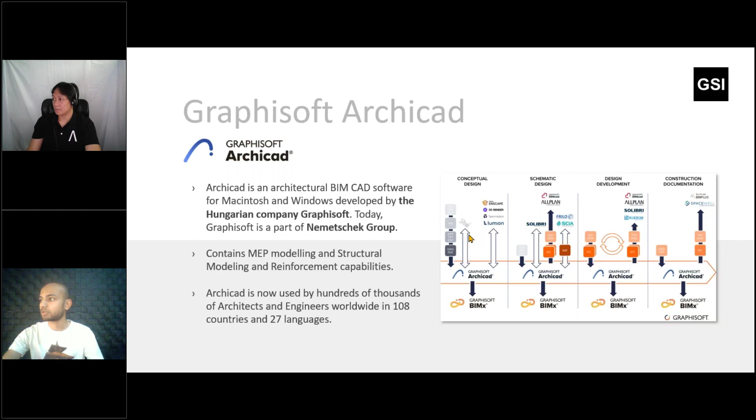On the industry context side, as we also discussed in the last webinar, Jayson and I had a good conversation about what the context is currently in the industry. So the design coordination between the project team is really necessary and essential for limiting design issues and construction site risks. In the construction of any infrastructure, the coordination between architectural design, structural engineering, and MEPF systems is crucial for mitigating construction site risks.

And it ensures project success if we coordinate. For example, let's imagine there's a building project with an architectural design featuring floor to ceiling glass windows, a high-rise building. The architects have designed the glass in a way that maximizes natural light and gives panoramic views. But without effective coordination between architectural, structural, and MEPF teams, this project may face a lot of risks.

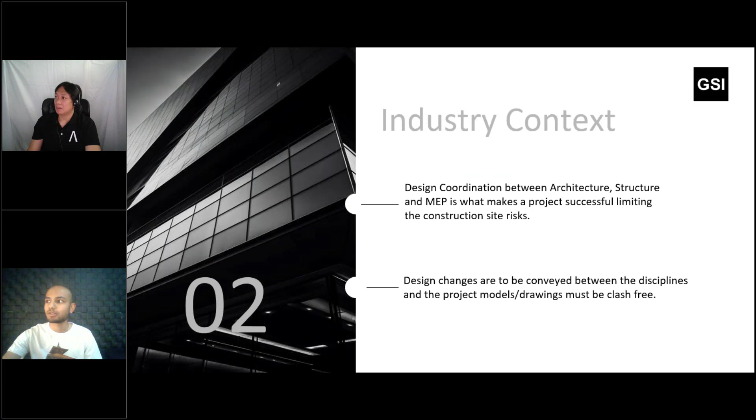So Jayson, do you have a say on the problem statement, which we can also talk about currently, regarding the open BIM approach between these disciplines: architecture, structure, and MEP? Yeah, thanks for that.

Based on the experience I've had before working with the MEPs, the problem is that the precast elements are the end product of the project. So basically what we need to know is the exact information of the MEPs. If they have recess or embedded fixtures, we have to know it in the earlier stage in order for us to really produce the elements on time.

What we face normally is that there are times when there's no proper coordination between different disciplines. So the MEP will most of the time be the last to submit, because they have to confirm it with the architecture or other disciplines.

When we go to incorporate this in our model and precast elements, there are cases where we already produced the elements because we need to catch the production on time. So there are cases where we need to do some hacking in order for these MEPs to be placed in the correct location. That was based on my experience, and this problem will always exist in every project without proper coordination of different disciplines.

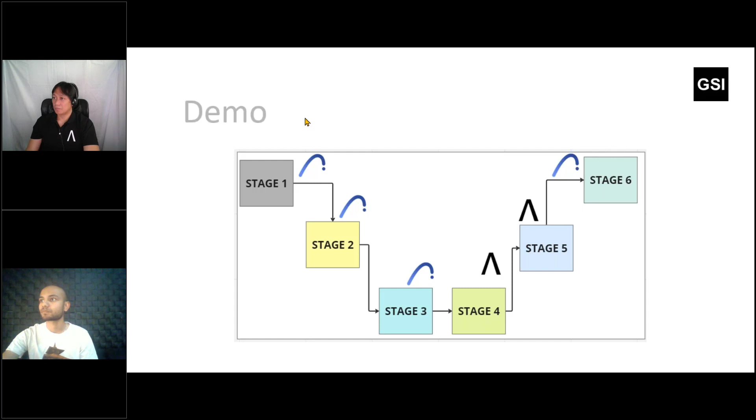Moving on to the general workflow, we have stages 1 to 6. Stage 1 is pre-design phase, 2 is model preparation in Archicad, 3 is MEP model routing, QA and export, 4 is structural elements import, design and adjustments, stage 5 is QA and model export, and 6 is import, verify and model sorting out.

So stage 1, we have the pre-design phase where we have a sample model already ready. On stage 2, we have the Archicad MEP model preparation, where the templates are already ready as well.

Basically, starting a project always requires you to have a correct template, the attributes, and the material libraries all set up. For this, the MEP library as well.

On stage 3, we will be doing the BIM modeling phase, where the MEP design will be clearly modeled as per the requirements. The MEP routing will be used in Archicad, and once that's done, the QA will be done and the model will also be exported towards Allplan.

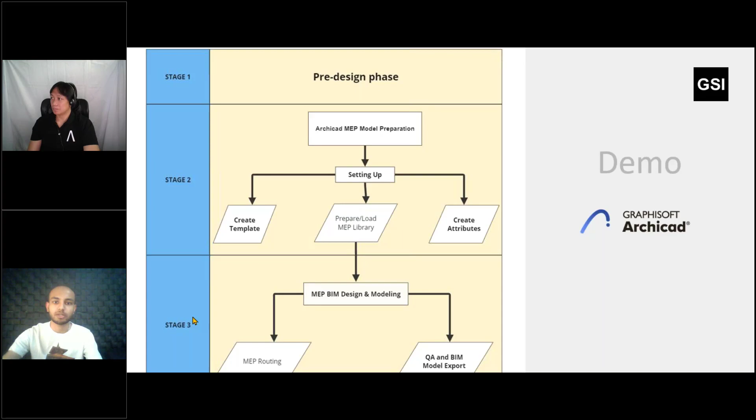Okay, so without further ado, let's start with the demonstration here.

So I have a plan that's set up here where the layers are on. The layers can be seen, which is a combination of architectural model and MEP. If I closely zoom into this parking section here, there's a conduit running out. This is the MEP we have here, and the rest is the architectural model.

So if I try and select the MEP element here, it has a lot of settings that I've already set.

So the system is placed on cabling, and we have an offset from the home story. We have these floor plan and section views where basically Archicad is using these symbols and floor plan display settings.

On the classification and properties, currently it's unclassified. But if we want to have the IFC workflows, we basically have to classify our elements properly so that the design teams from other disciplines can receive them and understand what the element is exactly about. So this is basically a cable carrier segment.

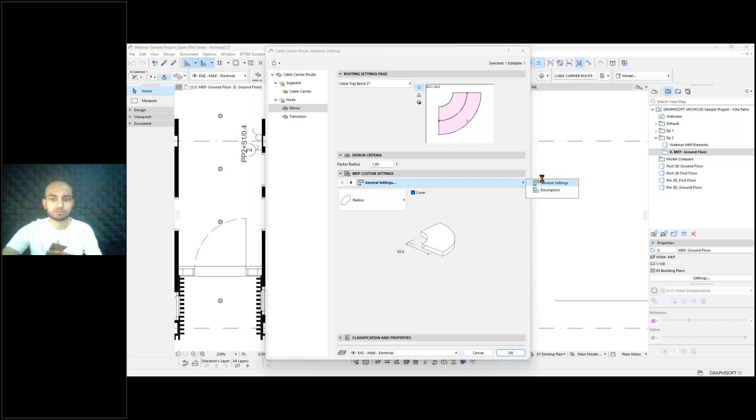So we also have the transition here. The transition can also have the cover or not have the cover. We can fill in various descriptions for this particular transition. We have the option to also fill in the user-defined descriptions. We can have the individual transition classified, and also the IDs could also be set for the particular transition.

But as long as we have the basic cable carrier route here all set with the classifications, we are still good to go. The other ones are going to be much more in detail, the segments and nodes. So currently I've only set the properties for the main cable carrier route, which will cover all these elements. And the layer system is kept at M&E electrical.

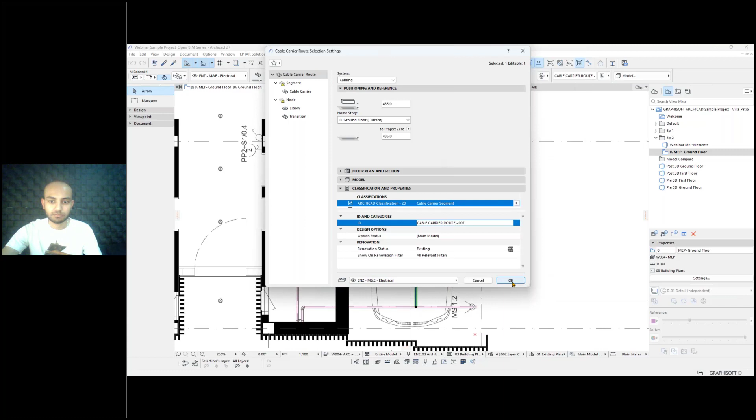So the routing options, basically for this webinar, I will simply just use the design tab where the MEP engineering tools lie, just to showcase how I placed those routes. So if I have this cable carrier route selected and I start to model from over here, let's say, it gives me an option. Okay, before I place it, I need to put it in the right layer as well. So I can go up here and quickly do the electrical, and then start placing it.

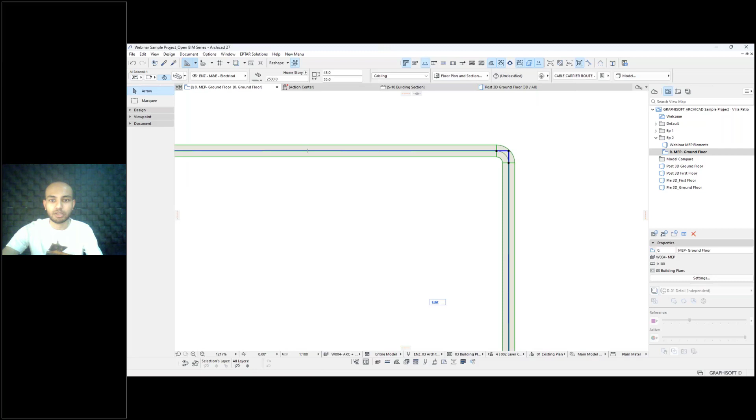So this is the plan view. I can do this plan view here. So as we discussed earlier about the node, it automatically places the node as per the settings we have set earlier. The cable carrier has been placed on the plan view, and now I'm going to view it on the 3D view.

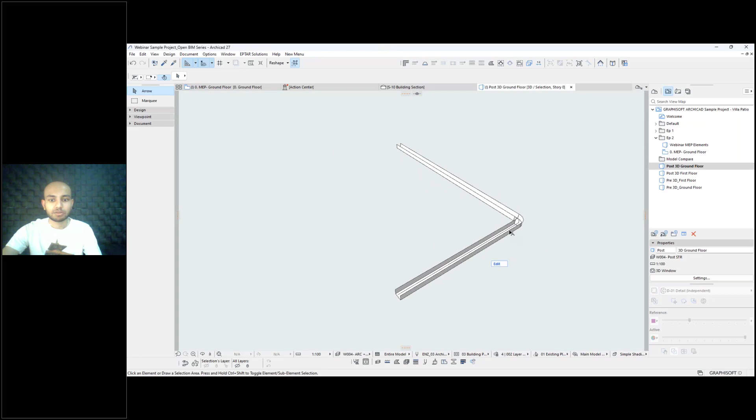So this is the 3D view. We can see the cover is not placed, so we can select that and go back in and try and place the cover as required for the elbows and also the transition. So once that's done, quickly the cover appears. If we want to show every model, I'll just try and show all.

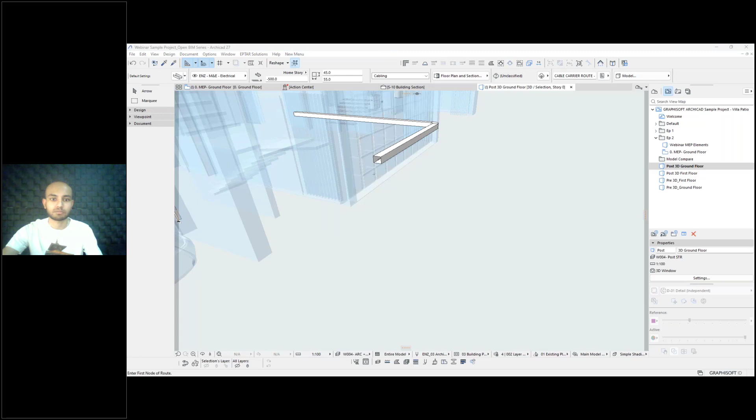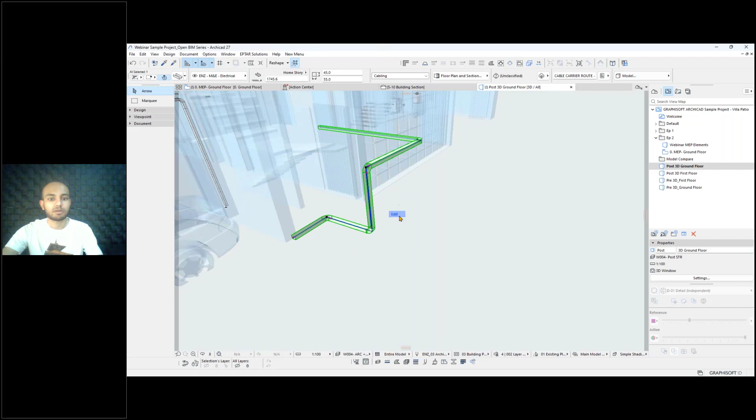So let's say for the example's sake, now the route has to vertically go downwards. So to do that, I can directly use the 3D view and make use of the tracker to basically model the elements. So basically we can model those cable routes, HVAC duct routes, plumbing routes in a 3D environment just by using the tracker.

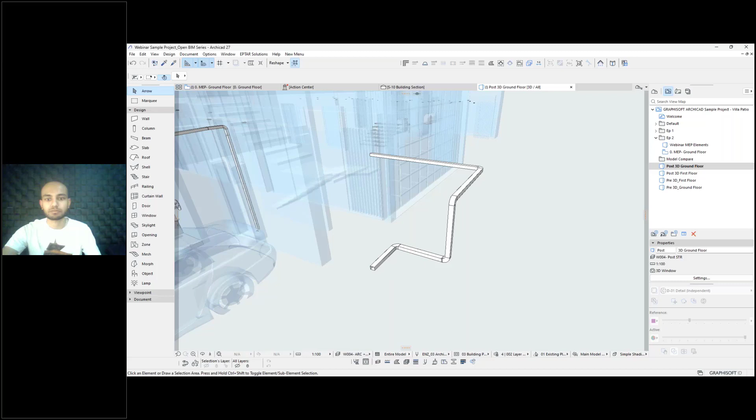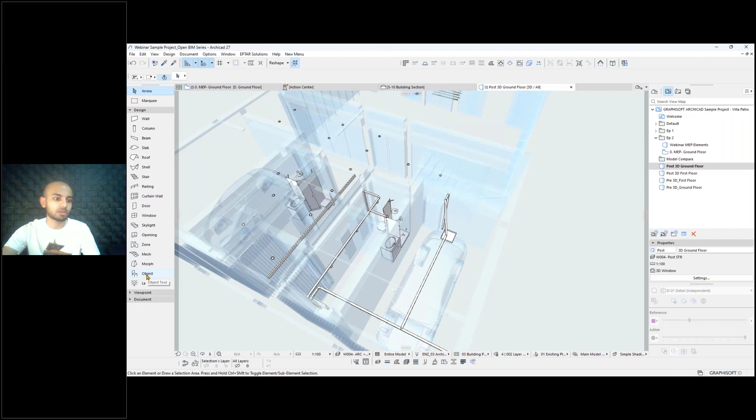So as you can see on the screen, the MEP models are basically modeled in the same manner. I have the electrical fixtures placed as well. We can use the object tools or lamp tool to find the elements we require in the library. So let's say if I want to find any lights, I'll hit on lights, and as per the need, we can select those here.

Or if you have your own material object libraries, it's even better—you can have your own materials loaded. Once that's loaded, you will have to select the lights that you need. All those settings here, the intensity, the distance, width of the geometry, all these can be set in this interface.

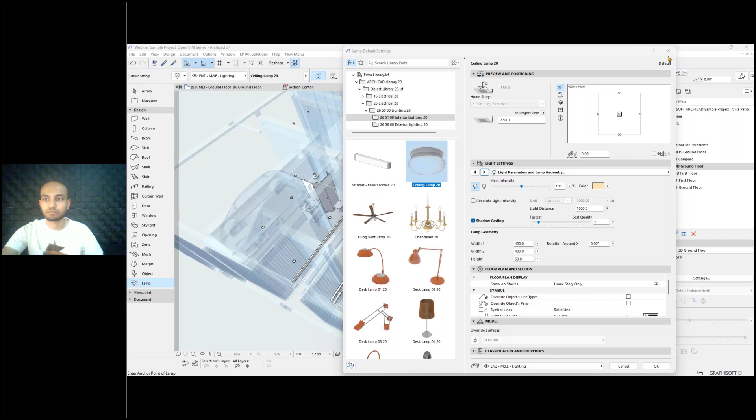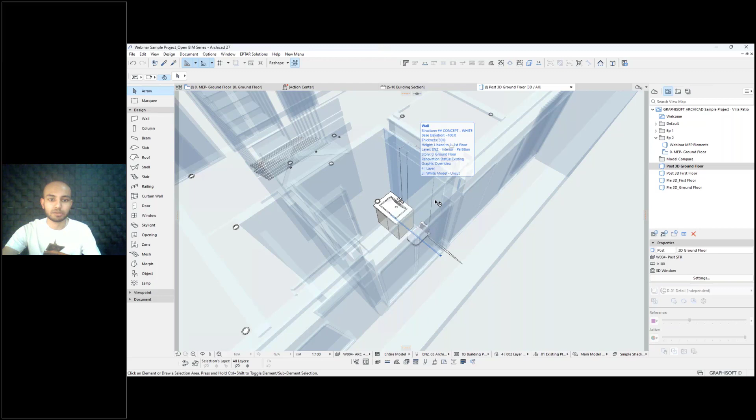The current view that we are seeing has a graphical override powered on, which basically highlights the MEP elements, and the other elements such as the architectural model and structural model sort of phase out or have an X-ray kind of look, so that you can actually see through the walls and doors, whatnot.

The elements which we can currently see here, the piping elements, is basically for the plumbing. This is also done exactly the same way using the MEP engineering tools here, the Pipeworks.

So now, once the stage of MEP modeling and routing is done—basically stage 1 and 2 are already done here, so we did not really see that happen—but stage 3, we had this idea on how to route the cables. For stage 2, if I really want to add here, we can talk a little on the library.

So the library manager is basically present in the file option here, and we can load on the libraries that we require. Archicad already has the migration libraries given, and also for the sample project we have this library all set. If there are any extra libraries that you need, you can go ahead here and add—select the add link library, find your library, and add it.

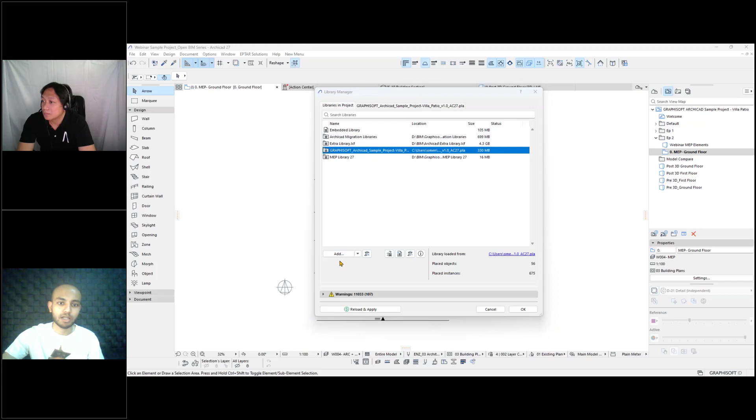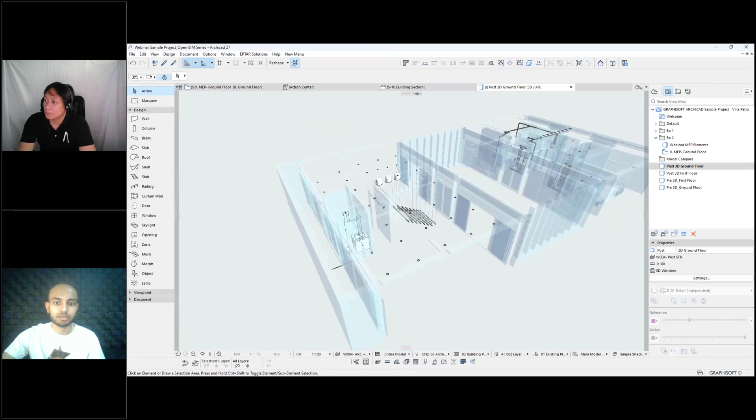So now for the QA and export, as I said, we use the graphical overrides to check for the layers, to check other visibility issues. We can check the layers of every element that's present here. We can see if the elements are having the correct classifications as well. If any element is placed on a wrong classification, we might want to adjust those before sending it out to other design teams so that there's no confusion.

Let's see if I can find a classification for this light. Okay, for this light, it says light fixture already, so it's placed on the right classification.

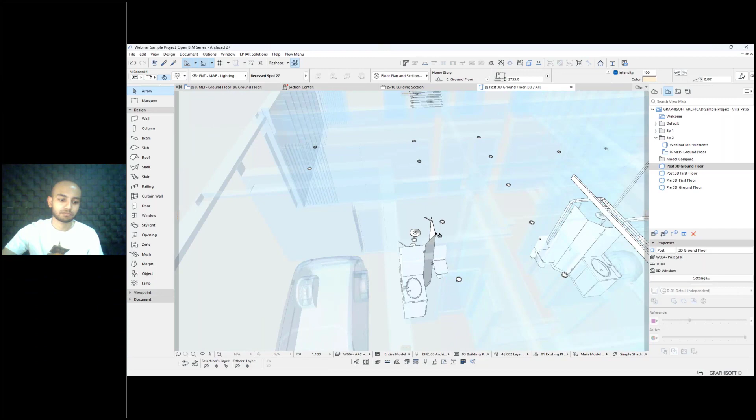So now once that's done, we send out this model to the MEP team or the structural team as well—we just send the latest design. If I just want to send the MEP elements only, I quickly switch over to the MEP layer combinations, and once that's visualized, we can go ahead and do the save as function.

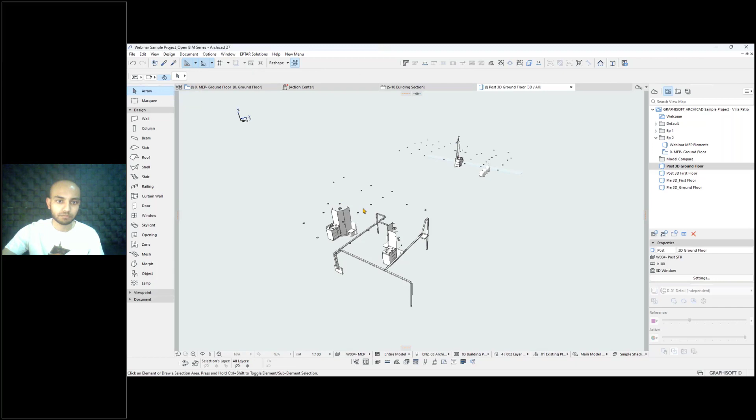So I would like to show you the translator options here, which is currently on a general export mode. All these settings here, the model view definitions, the IFC schemas, the filters, type mappings, and so on are already set. So for this, we will just use the general export.

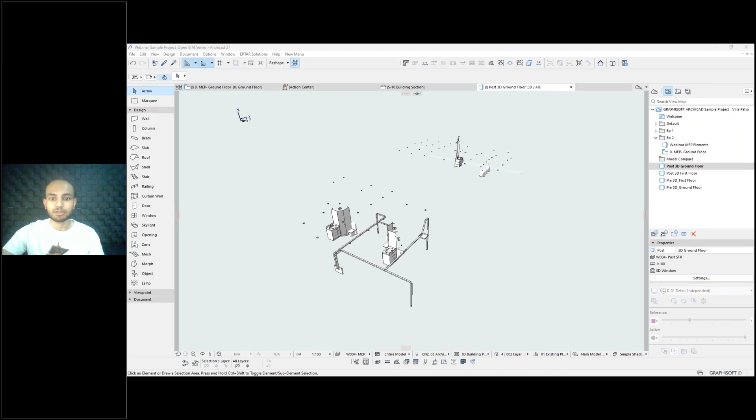So the model has been exported. Now I would like to invite Jayson to showcase how the elements are going to be brought back into Allplan, and the recess and all that stuff will be demonstrated. It's going to be quite interesting to see from his side as well now.

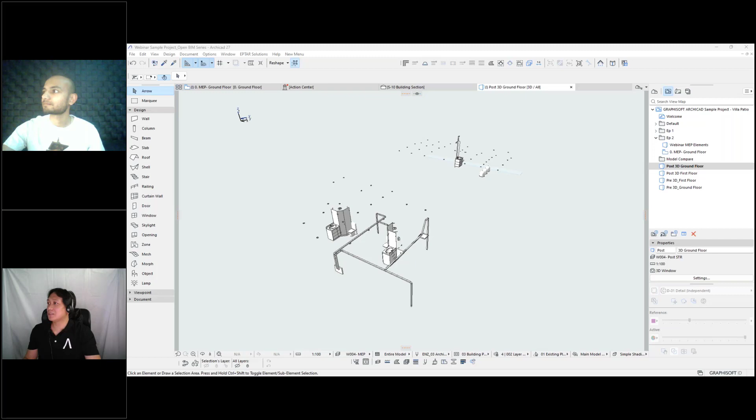Thank you, Sudhir. Right, so basically now you already exported, right? So I can share my screen now. Can you see my screen now? Yes, Jayson, it's visible. Okay, great.

So after stages 1 to 3, now we move on to stage 4, wherein we will import the model from Archicad to Allplan—that is the MEP that was exported by Sudhir. From there, I will show you the MEP functionality for precast, which can generate automatic recess on the element. With this automatic process, it will also adjust the reinforcements and of course the shop drawing changes. Then we will move to stage 5, wherein we're going to export the structural elements back to Archicad so that they can do the assurance or quality check on the elements.

I'll share my other screen. Yeah, you can see my screen now, right? Yes, Jayson, it's visible. Yeah, thank you.

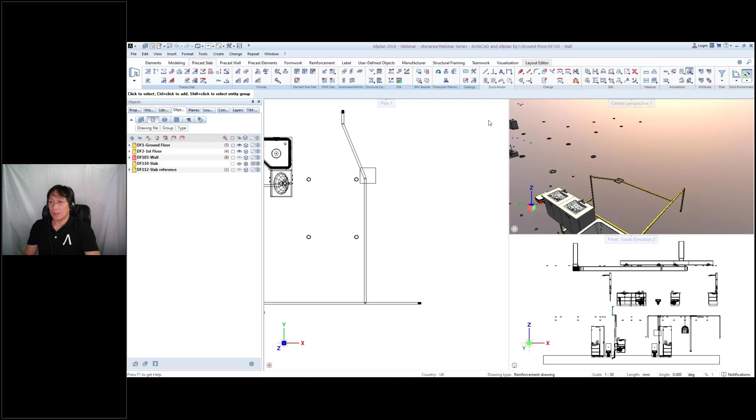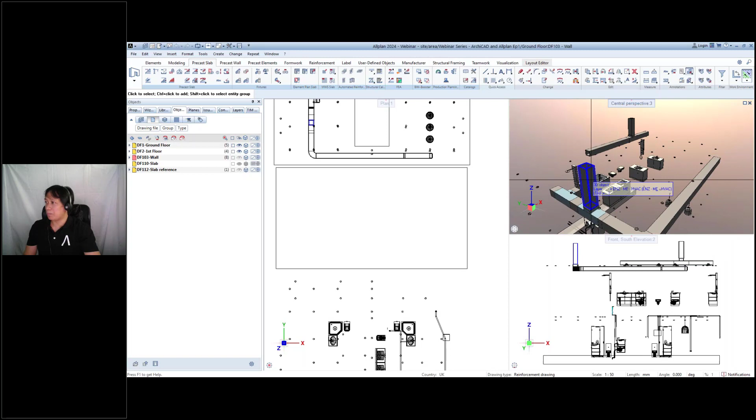So here, I already imported the MEP from the model of Sudhir. So basically, these are the MEPs he modeled initially. This is the one he's discussing, with this cable tray here, cable racks. And of course, we have these kinds of ducts that will be passing through the slab for the next level.

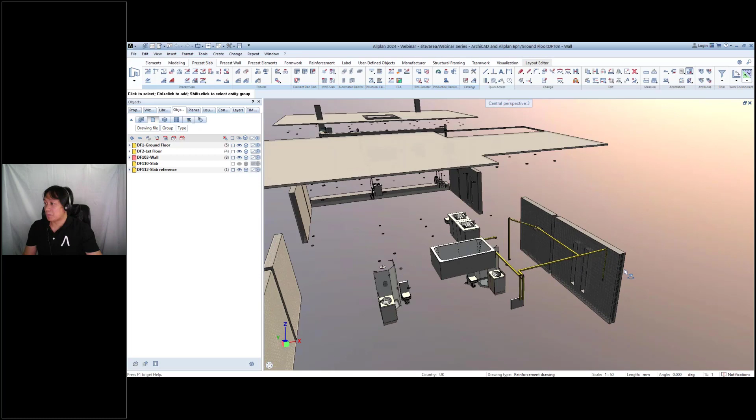So if I'm going to show you something like this, I will have a slab here, and later on I will change this to a precast slab. From the model, previously in episode 1, I showed you that we have these walls which we created as precast elements, and we have placed some reinforcements in them. So you can see here that there is this thing inside the precast wall, and the same for the slab. First, I will show you how it would interact with these precast elements and how we can generate the recess using this imported MEP.

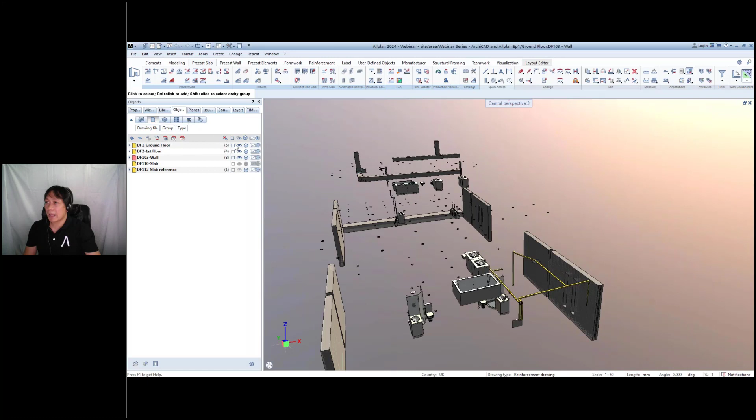So let me just remove those unnecessary things here. I will remove this slab, not this one but this one, so we can see it more clearly. For this case, this is the only part where it goes into the precast element or the wall. So this is where we're going to focus now.

So here, what we're going to do is go to the precast wall, and we have this functionality of MEP Wizard. Once we click this one, you have two options, two objects to be selected: either smart symbol or 3D objects.

So basically we have here, let's check. We can select this and you can see it's a 3D object, so we can use this as a 3D object. From this, for this case, we will provide a recess for this precast element.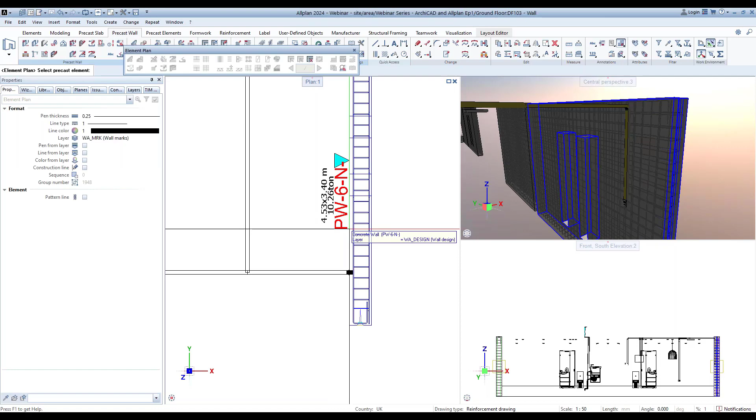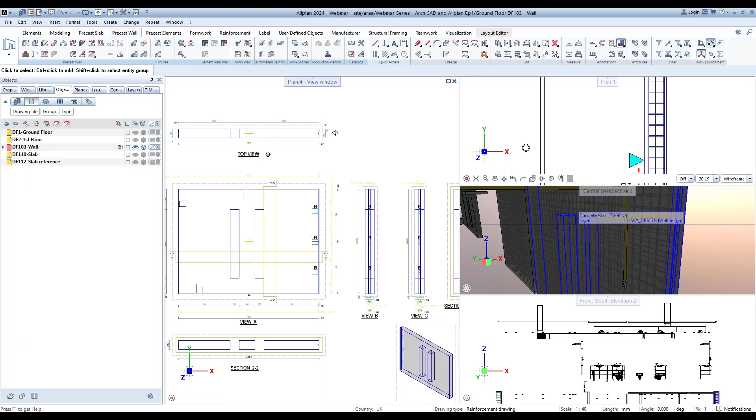Before that, I can show you that, as I mentioned, we can easily generate the shop drawing of it. So we have this shop drawing. Here is the sample, automatically generated. I open this one so you can see how interactive, how they synchronize whenever we do some changes. So I will leave this open, and maybe close this part so they have a better view.

So what we're going to do now is click this MEP Wizard, and then select these 3D objects. I will select the component, which is the precast element, and then we'll be asked to select the MEP objects. So I will select this part, and as you can see, I have these 3 elements. If I click on this one, it highlights which object you are selecting, this one or this one. So basically these 3 are the elements touching my precast element.

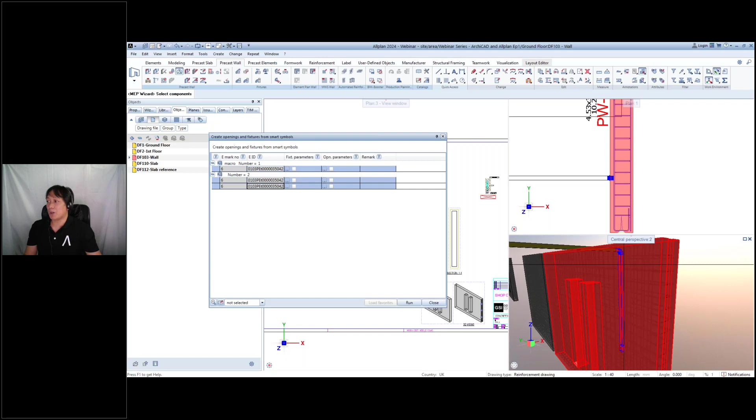So what I'm going to do is I want to make them, or provide an opening to these elements, so that whenever the MEP comes in, they will just place this on my precast element. So what I'm going to do is click on these three dots and select parameters. Here I can say either rectangular based, rectangle based on center, or circle based on center or circle. So maybe I will use the rectangle here so it will detect the perimeter of the object and offset based on the perimeter.

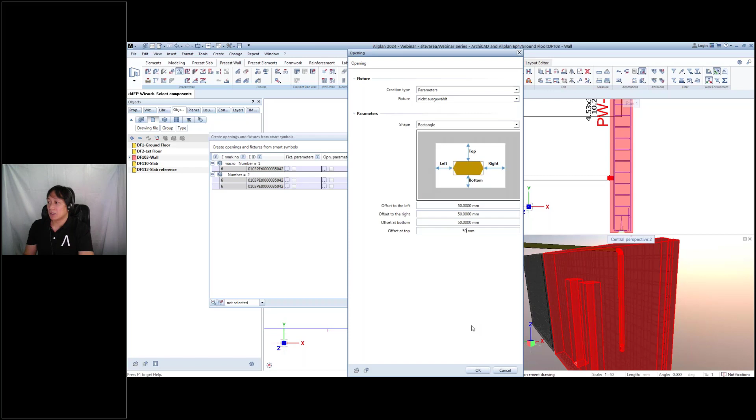So I will just exaggerate. Let's say I want to have a 50 gap from that object. So once I select OK and then run, these are just for the bars, as you can see. So here it gives you automatically the recess. Let me just zoom in. Okay, so you can see here that I have provided a recess.

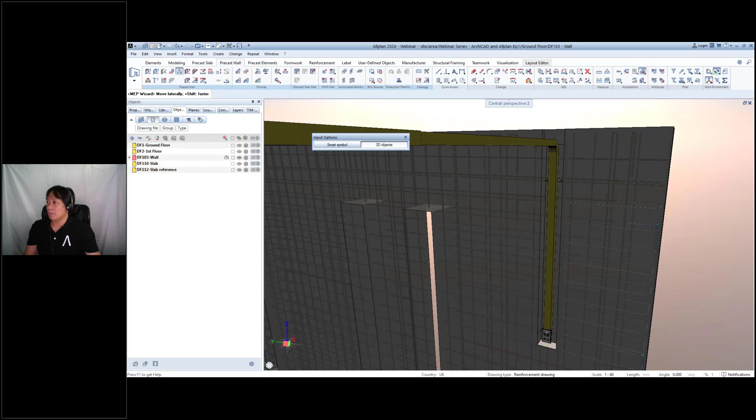And from this recess, you can see that the bars are automatically cut out. For this case, you can see that this bar was not cut because it acts as the holding bar for this part. So of course, on the side, you can just cut this if it's really needed. But for the other bars, it was already cut out. Okay, so this is how your MEP Wizard works.

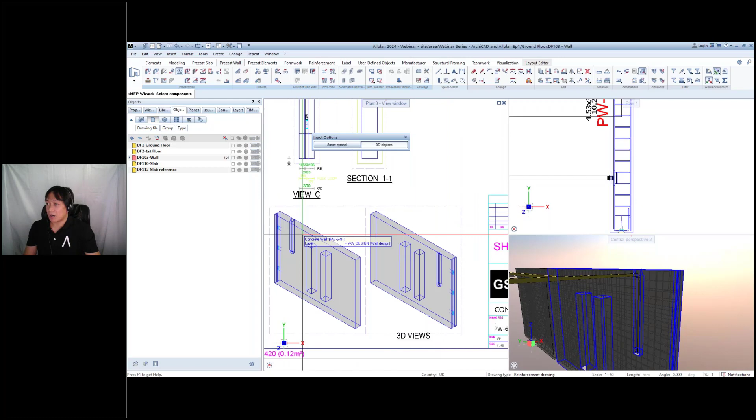And of course, once you do the changes, as you can see from this part, you already have your cutout. So you can see from here, there are cutouts. If I go back to my reinforcement, as you can see, there are some parts that have lines here, meaning it was cut, as well as these isometric views shown. Okay, so this is how the MEP works.

Now, basically this is not only for cutouts, but it can also be, let's say, we want to embed this fixture inside the precast element. So there are cases, let's say I want to copy these elements.

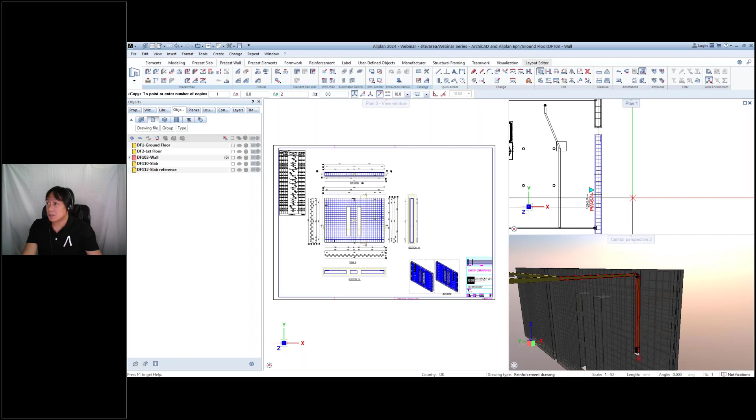So I will just do copy and move somewhere here. Let's say I provide on the y-axis a distance of 2.9. So I will have another, let's say, cable here with the same socket, but I want to embed this fixture inside.

So what I can do is do the same process. I will select this MEP wizard, select the element, MEP wizard. I will have the same properties, but instead of the opening parameters, I will just use the fixture parameters. I just need to see which one I'm selecting, so maybe I can select this one and fixture parameters.

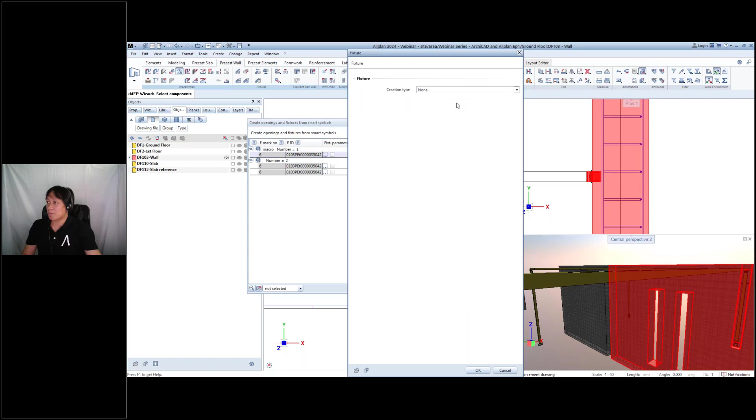So I will select from my library. I just want to show you that from the object we selected will be this. So we will replace this with the whole part of the cable, including the switch. Let's try to select which one, project, webinar, elements, MEP, and then we will replace that one with this fixture. So it's one object already. I will just say okay.

So from here, I will just rotate this and adjust based on the correct location. This one is pre-calculated, so just to make our time less, I will define the location, say okay, and then run.

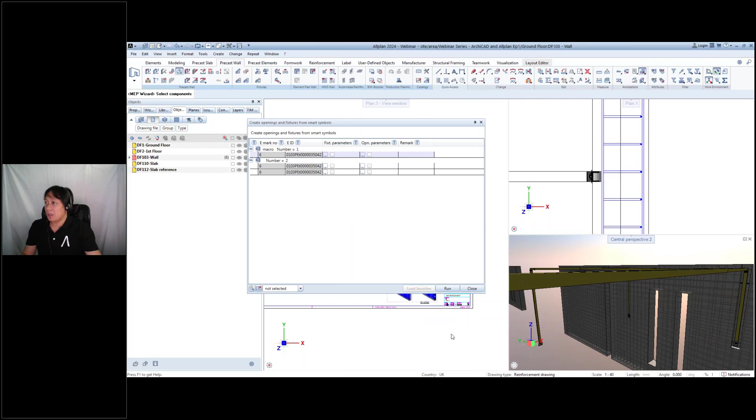As you can see here, nothing changed because it's still the same place. But if we open the shop drawing, as you can see here, it gives you the fixture. It places the fixture that you have created. It's this one, okay.

So basically, it's not only creating the recess, but also placing directly your fixture, or your MEP elements. So to see it in an isometric view, I just have to close this drawing, and as you can see here, I just remove the view. Let's remove the view and open this.

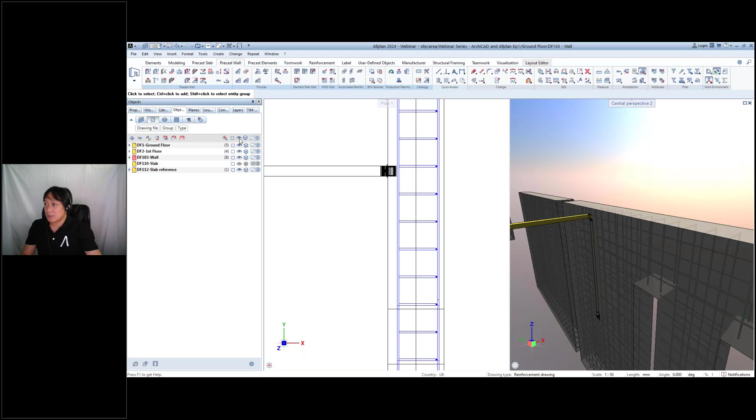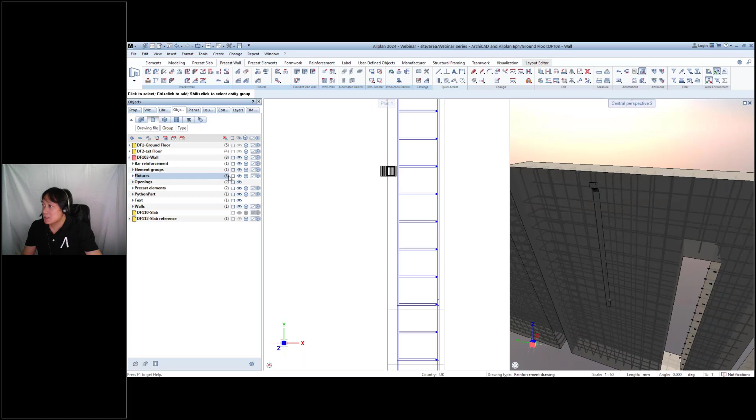As you can see here, it is also inside your precast element. So maybe I can say remove this, no, not this one, but the walls. Yeah, this one I think we can select. So this is how we can select the object inside your precast elements.

So let's say there are cases where you need to shift this by only 2,800 from the other one. So what I can do is move this, the one I copied. Maybe I can say move, not this one, but this one, move the object. Of course, we can move it

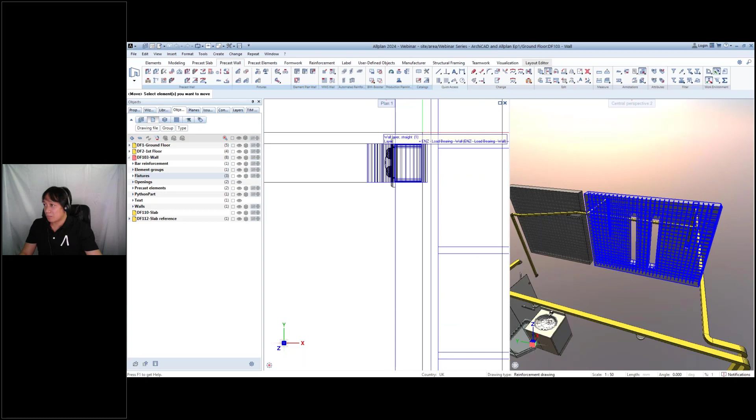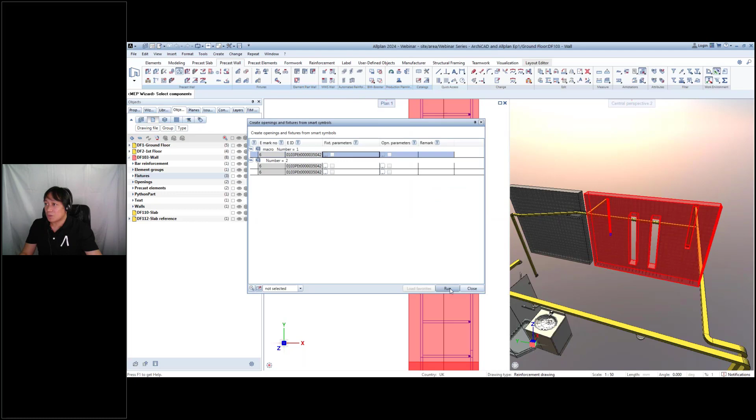directly on the fixture that we placed, but we want to move this element, not this one, but the rest. So maybe I can remove it first. Let's try to remove it first. I don't want to see it. So I guess there's no more, right?

So let's say I want to move this part, or better this one, the recess. Let's say I move this part maybe another 200, maybe the location was wrong. So what will be the effect? Your precast element will already be wrong because your recess will be here.

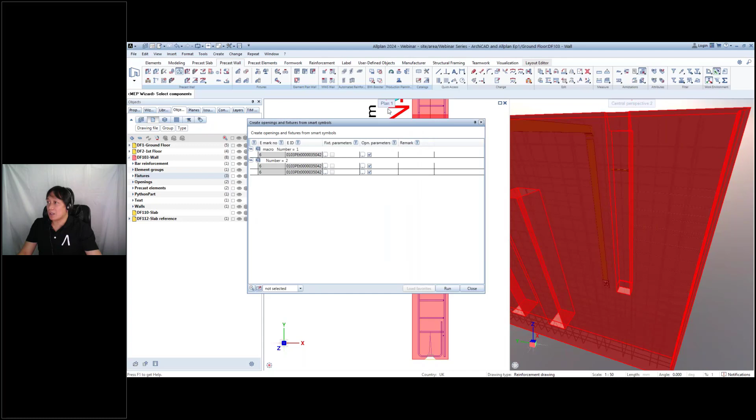Using the MEP wizard, we can just select this MEP element and rerun this, and you will see that your recess will adjust based on the new location of your MEP. Same as what we did here, we can change the location of this and it will automatically shift your fixture.

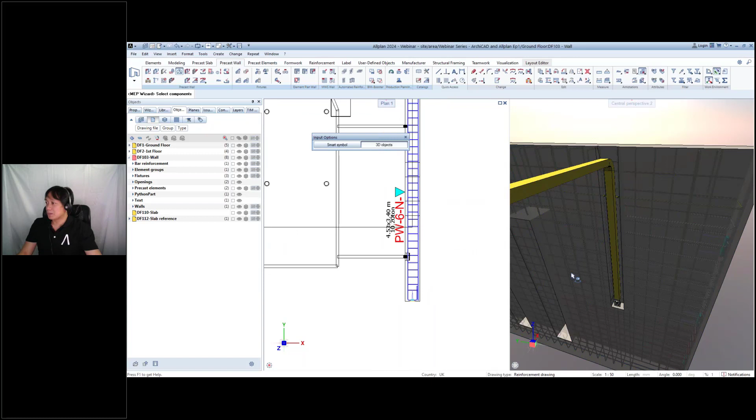So yeah, this is for the wall. Okay, so we can move it back. Okay, and then we move now to the slab, wherein we have these ducts here that are passing through this slab. So I will just need to open my slab. I have to open this and make this my default.

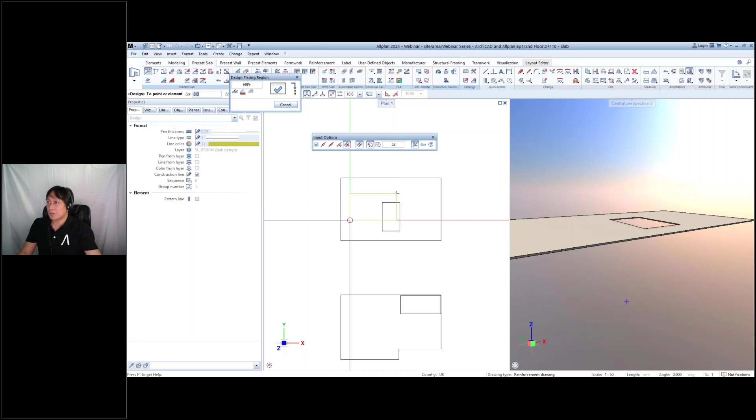I will just open my reference, and I can generate the slab here. So basically, what I'm going to use is a precast slab, like what I've shown in episode 1. Select the design, and then I will select the boundary inside. I can say, yep, I have to select the boundary. Normally this should be okay, so let's try to have this.

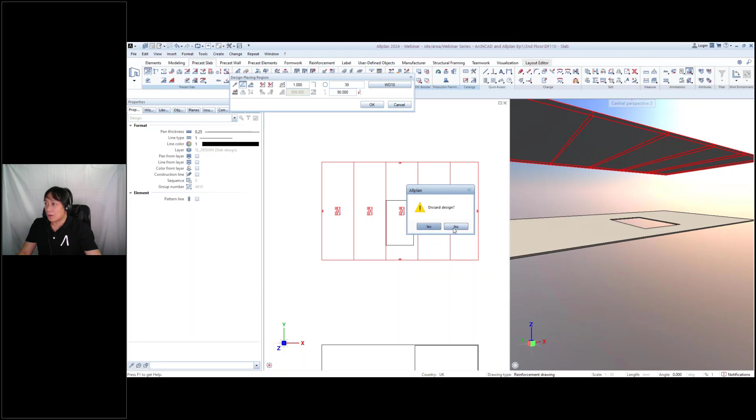And then we don't want to discard, and we just say okay. So basically I have this. We can provide cutouts.

So we need to have this cut. What is the size of this cut? Let me measure, so from here to here, it's about 2150. Okay, we can just say provide recesses, then we can define this.

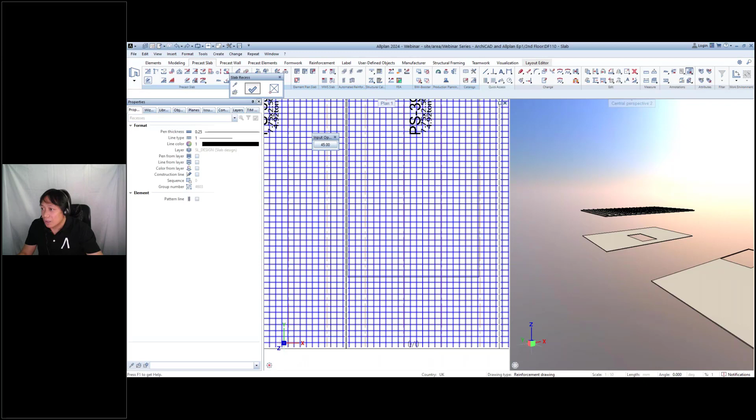What happened? Let me try again. I cannot find recesses. I have to change this by what size? I forgot, let me try to measure again.

This is 2150 and 3540. 150, 3540. 150, this one 3540.

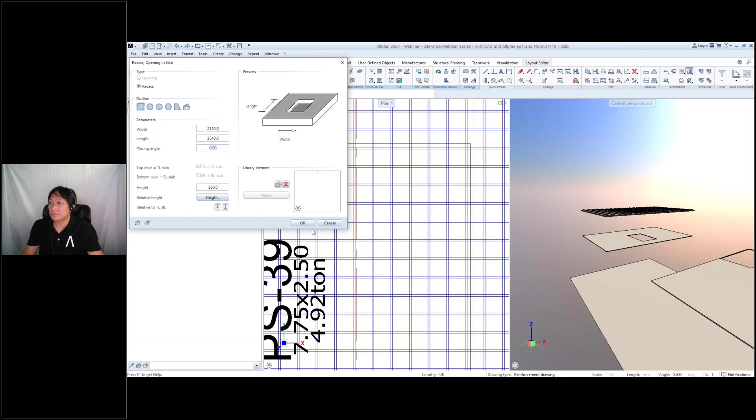So we have this now, and then I will just select this part, so I will have my pieces. Where is it? Let me check. Oh okay, this is my slab pieces.

So from here, I need to shift my model, but before that I need to check if it's in the correct level. Yeah, I have to shift my model, so let me shift them down.

Let me check where's my reference, I have to open them. So I need to shift this to this level. Basically, I just need to fix my X.

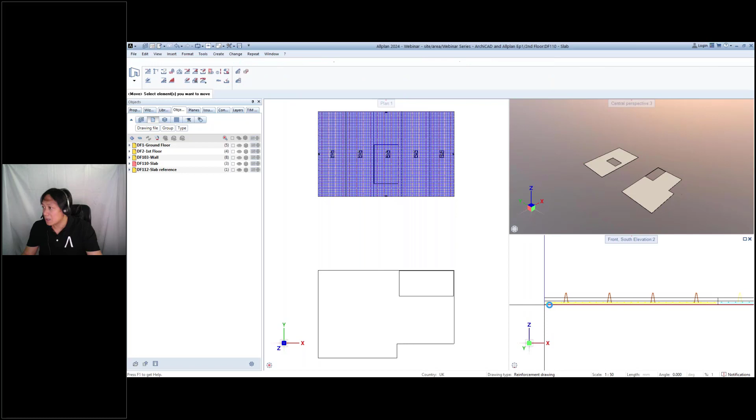Then this also slab recess. I need to fix X somewhere here so that I will have my opening.

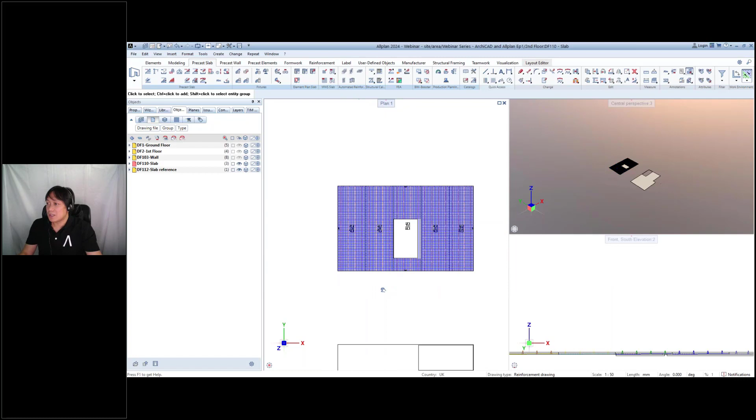Okay, delete this part. Okay, now I have this and I need to have my duct here.

So I will just open my slab and then my duct, which is the other one. Okay, so here it's passing through my elements, so I don't need this part.

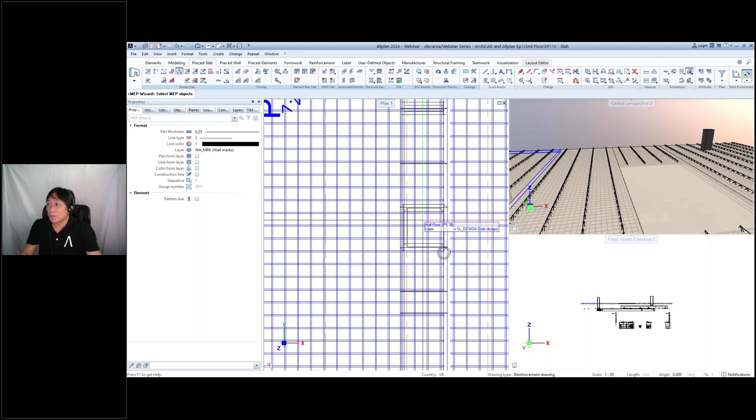So I will do the same using the MEP wizard, and I will select my element and then select my, where's the dot? It should be, oops, sorry. Let me do it again. Select the element

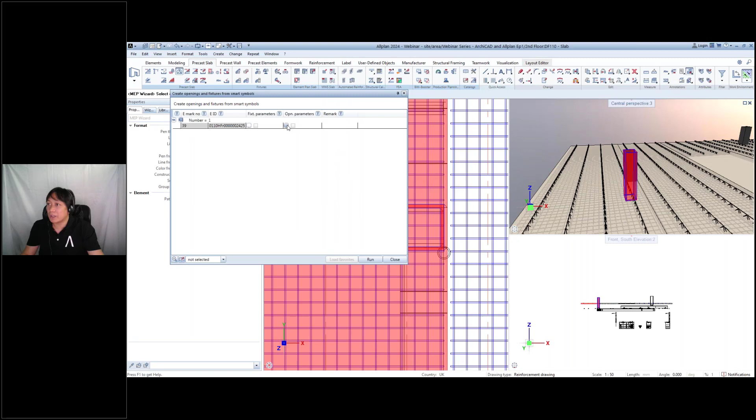and then the MEP, so I will just have to select this and I will provide the opening. Of course it should be an opening because it's a duct passing through. So I will just use rectangle and maybe change to 50.

Say okay, and then run. So as you can see from here, my slab reinforcements also cut. My slab has cut out based on the parameters that you provided, so it's a 50 opening, 50 from the edges of the object.

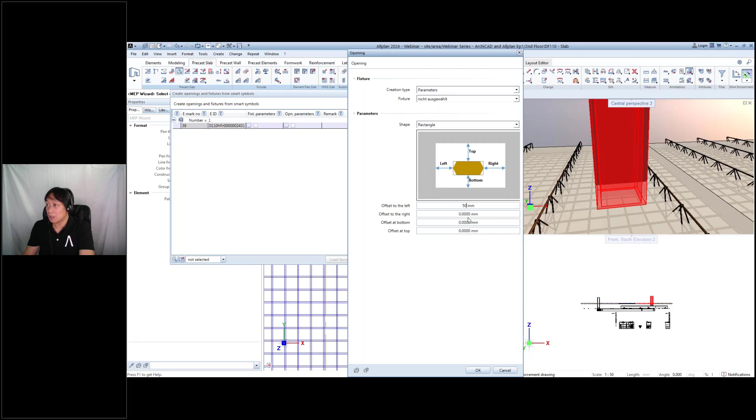Same as what we're going to do here. I will just select the component, select the MEP, and I will do same parameters, and then say rectangle 50, 50, 50, 50, and then run. So basically you will have this opening as well on the other side.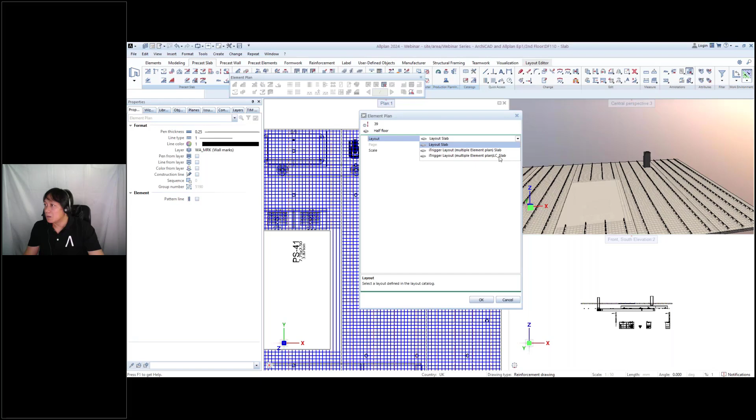And of course, shop drawing wise, what you have seen from the slab, it's also the same. Maybe we can try to create a slab here. Let's try if this will work, because I didn't change anything here.

But of course you can see here, it has these recesses or opening with the girder cut, and of course the reinforcement as well. So it automatically generates the information you provided.

Again, if we move, let's say we move this object from here to, let's say, y-axis about 500. So let's say your MEP changed, of course this recess needs to update.

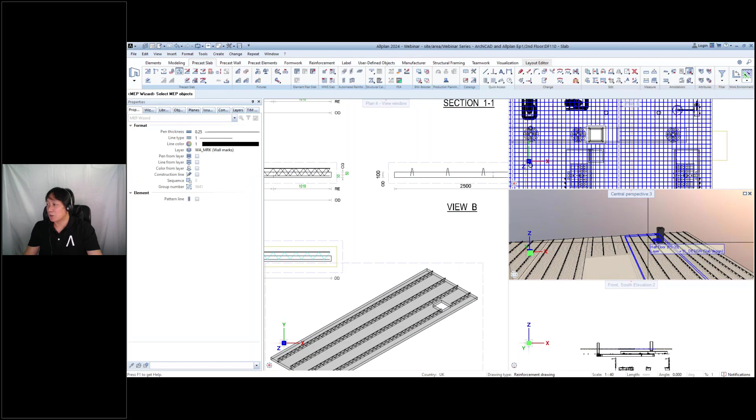So what we're going to do is we do the same. MEP wizard, select the object or the element, and then the MEP object.

And then here, instead of this, you just have to rerun, and automatically it will adjust on the new location for your MEP, so it will give you the proper dimension. Okay, so that's the power of the MEP wizard.

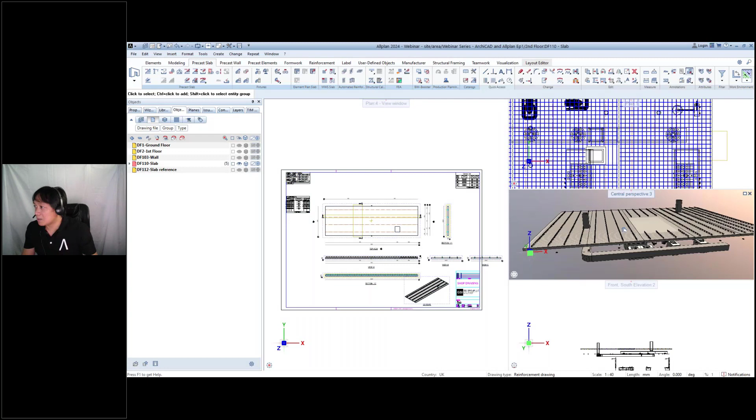So what I'm going to do now is stage 5, wherein I will send this by exporting the IFC model to Archicad, back to Archicad. Only these slab elements and the precast wall by exporting IFC.

And then I will have to select which element, so it's the wall and the slab, and I will just say OK where you want to save it. So it will give me on this part, which I already saved it, and also already sent to Sudhir.

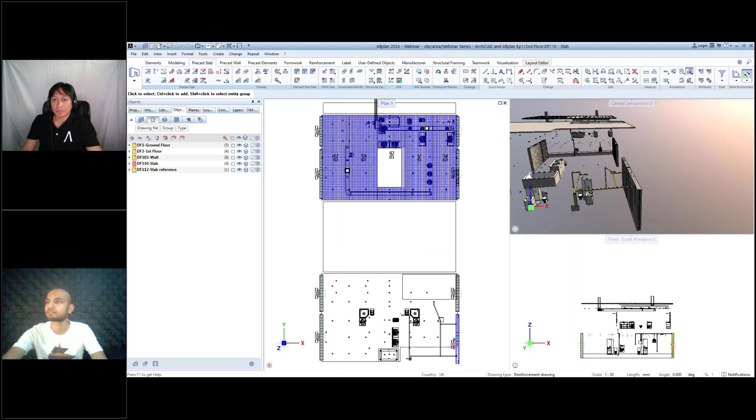So now that I have the model from Jayson, this is going to be the basic workflow for the next demo. So the models can be basically imported from other disciplines, and these can be either used as a reference or it can be merged into the model for direct output.

So by referencing a model, we duplicate the elements, and the elements are to be handled independently by each discipline. So this gives a better control over the drawing output.

However, if we have the models and get them merged inside Archicad, then it is basically much more time efficient, and it also results in less repetitive works. Although this requires much more trust between the disciplines.

So basically, while receiving the model changes, if we merge them, we need to make sure that the disciplines have sent us the latest file and everything is well discussed before having those files merged.

So both of these strategies, referencing the model and merging the model, have consequences in model performance. So we also need to take this into account as per the team's hardware capacity.

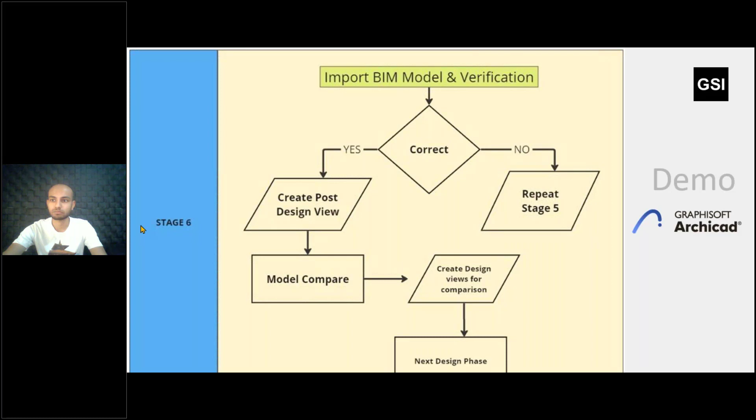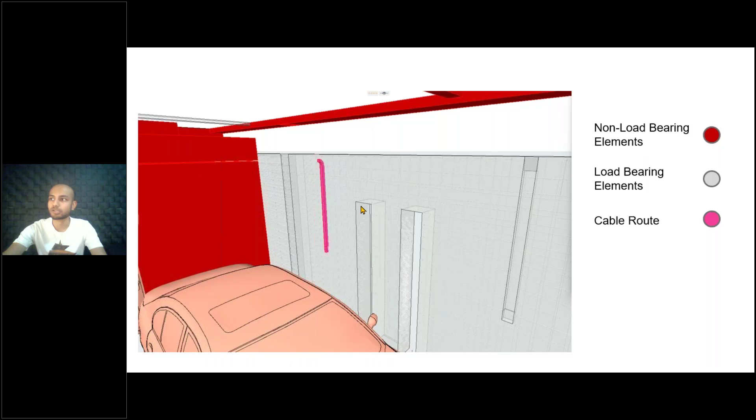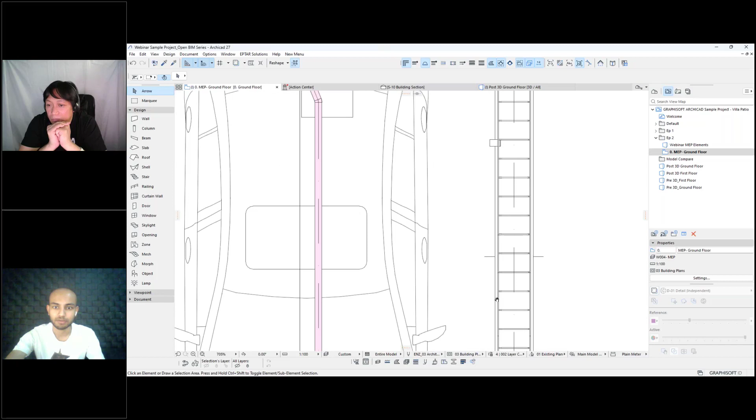And there we go. So all the elements that were placed in Allplan are now seen in this file in Archicad as well. We can see that the rebars are visible, and the cable routing can also be visualized here.

So we can visualize its settings as well, and adjust the properties as needed. If we quickly try to see this in 3D view, we can do that using the marquee tool. So this was what got sent from Jayson.

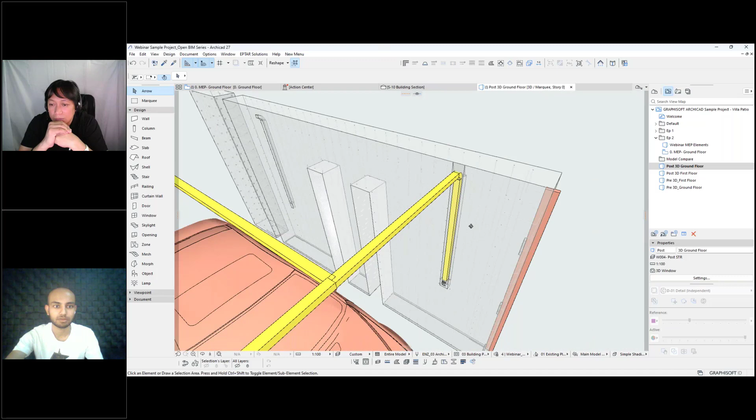If we use the graphical overrides for visualizing the elements clearly, we can see that it's highlighted over here. And if we want to filter out all the elements and show them, that's also possible. As I said earlier, the red ones are non-load bearing, and the gray one is the load bearing elements, which is clearly visible.

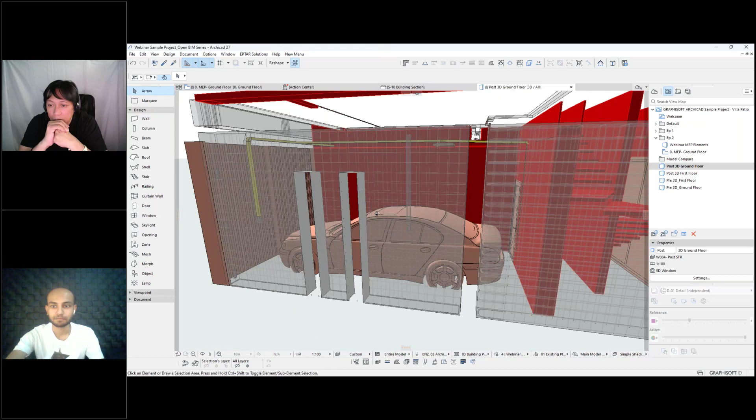So this is the ground floor that we are viewing. And currently on the post 3D view, we still have to set up the layers correctly.

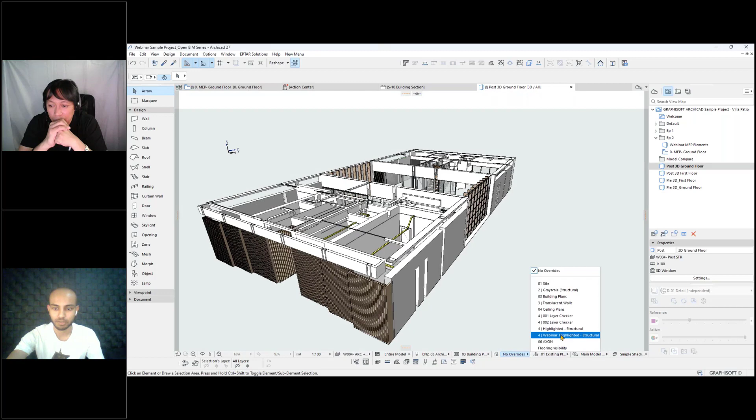So this is the view that we have here currently. Adjusting also the architecture with post-structural elements, we can update those. Have these ready so we can have the elements highlighted.

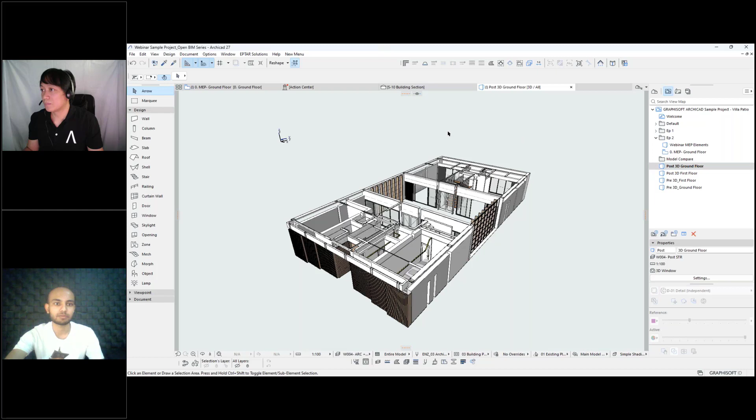Moving on to the model comparison feature here. If we go to the design tab and start with the model compare, I'll currently select the model that's open, which is the post 3D view. And model 2 I'll also select to be the current one, then go to the view selector. The view selector is powered on after we have these models selected, and then we can individually select them.

Currently it's on apply common view settings, but we do not want that. We want different view settings. One is going to be the before view, and the other one is going to be the after view, so that we can check what's the differences between the before and after.

So I have these views already made ready here for the ground floor, before ground floor, and after. If I hit compare, it's going to compare those two models.

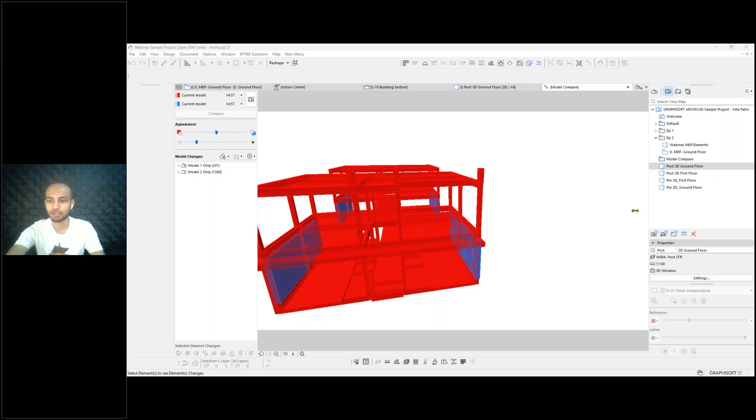So we can spend some time to wait if they have some questions, right?